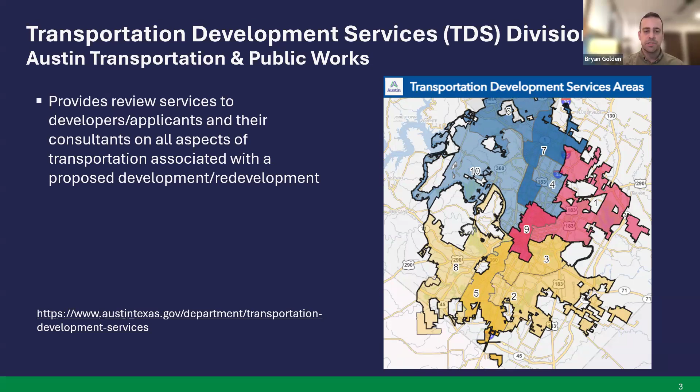Just to say, the TDS division is not within DSD. We're actually within the Transportation and Public Works Department, but we work in close coordination with DSD in the review of site plans, but also subdivisions and zoning cases and other permit reviews as well.

So I'll take the high level, 30,000 foot view here, and talk a little bit about how we guide growth in the city and the components that speak to that. The overarching planning document for the city is Imagine Austin, our city's comprehensive plan. It's a 30-year long range planning and goal oriented document that speaks to many different disciplines and priorities, some of which are transportation related.

We also have the Austin Strategic Mobility Plan, the ASMP, which you can think of as a transportation focused comprehensive plan. The ASMP stands with Imagine Austin as a separate document. It has been adopted by council, and similar to Imagine Austin, it's on a 20-year timeline, to be updated every 20 years, but still a long-range, forward-looking document.

The ASMP really speaks to all aspects of transportation within the city, so all different types of modes, meaning how you may get from one place to another - pedestrian, public transit, biking. We'll get into that more in a little bit. But the ASMP tells us what roads need to be built in the future, what bike facilities need to be built, in order to achieve the goals that Imagine Austin has laid out.

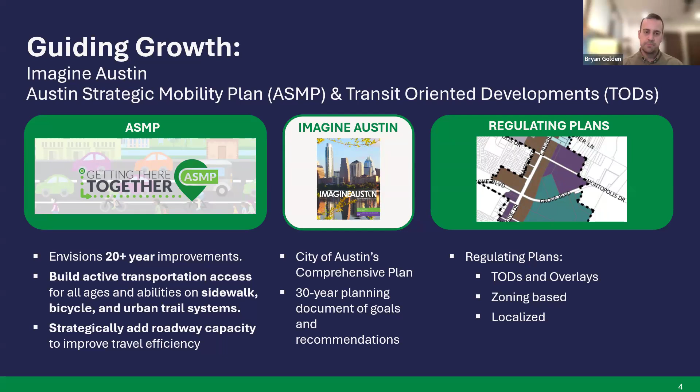Finally, the other little unusual piece of this is our regulating plans. You may be familiar with Chapter 25.2, the zoning ordinance, the zoning chapter of our land development code. The regulating plans are similar to 25.2, council adopted plans. The reason I bring them up is because they have their own specific set of transportation priorities and design criteria. We'll get into this more a little bit as well.

First, though, I want to dive into the ASMP just a little bit more. As I mentioned, it does speak to all the different modal aspects of transportation here in the city. So we have the public transit component, a bicycle system component, the urban trail system, pedestrian network, which would include all of the sidewalks, and then the roadway system, which is what most people think of when it comes to streets.

Drilling down a little bit more into the roadway system, we're going to focus on that a little bit here. We have the street network map, and what this map does is classify every street in the city with a level designation for every type of street, based on a level 1 through 5 classification. But we actually have a level 0, which would be alleys.

Most of the development that you may be familiar with will be occurring on a level 1 plus street. The way I like to think of these street level classifications is you could think of it as a river's tributary system. We have our level 1 streets, which are our local streets - that may be what single family homes are fronting, what you think of as your neighborhood street, your direct access. These are low capacity, low volume roads, and you can think of them as the tributaries of a creek.

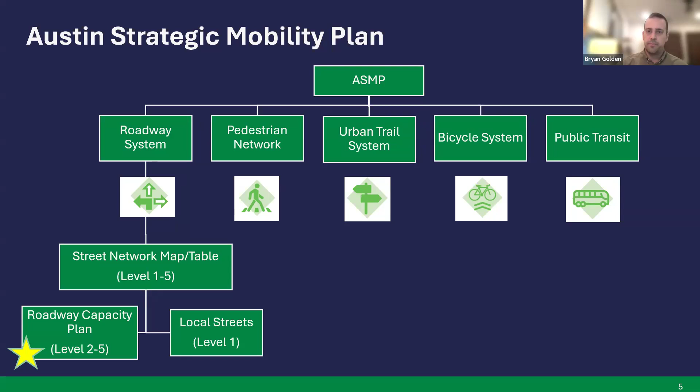The roadway capacity plan is literally a map of the projects that the city will implement in the future, either through capital improvement projects or through the development process. This roadway capacity plan identifies new streets that need to be built, or widening or upgrading substandard streets that may not have curb and gutter right now.

All in all, there's about 1,100 different projects included in the RCP, the Roadway Capacity Plan. These are divided up into 17 different service areas, and I'm not going to go into that, but that's referring to the street impact fee. There are different service areas associated with that.

But just to say that it is dispersed. These projects are dispersed all over the city, and they're based on prioritization models, which include development patterns, growth trends, and different community criteria.

So travel choice, how residents move along a corridor, how they need to get from point A to point B, commuter delay - that may be how long somebody has to wait at a signal - traffic safety aspects. So we look at crash data, and we look at our Vision Zero policy, as well as access and connectivity. So what new areas are built that need to be connected to existing areas, or existing areas that need additional connections.

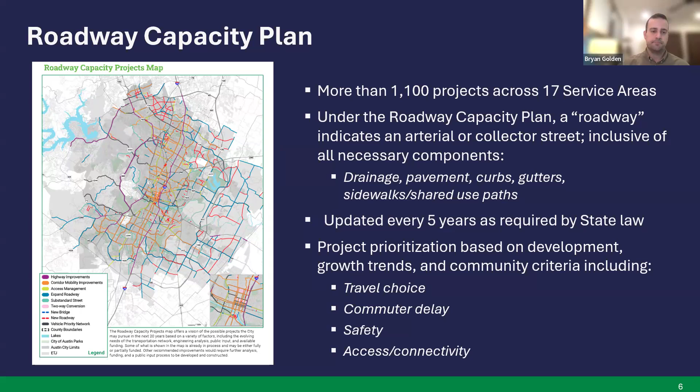So following up again with the regulating plans. As I mentioned, these are council adopted. They are regulatory plans, meaning that if you have a site, if you have a development that falls within the boundaries of a regulating plan, then your site is subject to those rules and regulations.

Right now we have 5 different regulating plans. You may also hear them referred to as transit-oriented developments, TODs. These plans were developed to guide additional growth and density into areas that are well served by transit, and to orient development to capitalize on those transit connections.

Briefly, I want to also mention - you may have also heard the term Great Streets for downtown and the University Neighborhood Overlay, the UNO district. These are not actually regulating plans. They're overlay districts, so they're really opt-in to a density bonus program.

So if your site falls within either the downtown density bonus area or UNO, which is primarily West Campus, you can opt in for your development to have increased density or height. Subject to that, you'll be required to adhere to certain streetscape requirements - lighting, enhanced materials, wider sidewalks - but it's not regulatory in the sense that these TOD plans are.

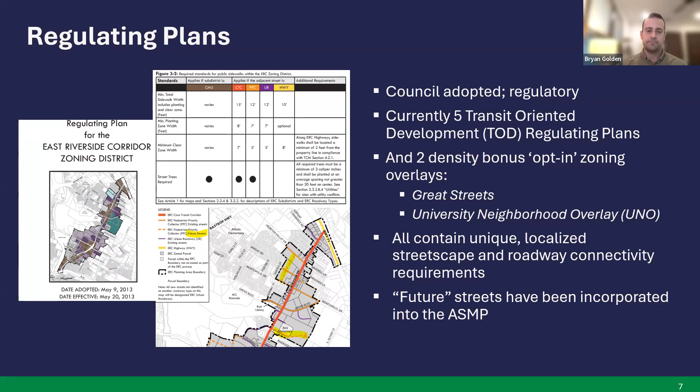All right, so now we've talked about the bigger background picture, what guides us in our growth, and now I want to talk about what that looks like at the more site level, and how we actually review and guide development themselves. So there are 2 primary components to this.

The city's regulatory authority to review sites and site plans for developments comes out of Title 25, which is the Land Development Code. Transportation specifically - most of our elements come out of 25.6, the transportation code.

And what you will find under 25.6 would be right-of-way dedication requirements. If you have a large site, you may be required to submit a traffic impact analysis or provide some off-site mitigation - that comes from 25.6.

Our former parking requirements and existing loading requirements also come out of this chapter, as well as the street impact fee, which is its own ordinance but is included in 25.6. So the Land Development Code tells us what needs to be built, essentially, what needs to happen.

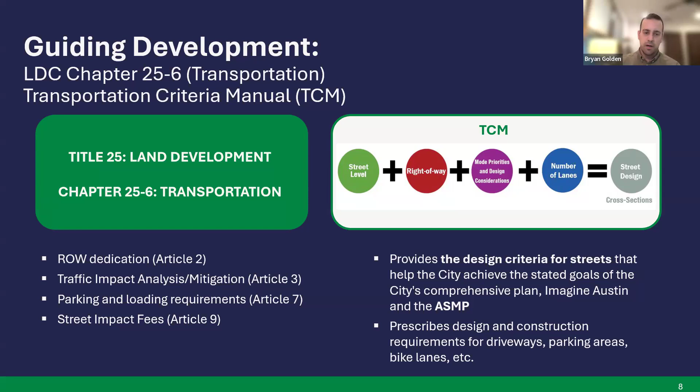But it also includes elements that are site specific. So the TCM tells us how wide a driveway should be, what a driveway needs to look like, what parking areas need to look like, and how wide a bike lane needs to be on the street. It's a very large, encompassing document, and we refer to it quite a bit in our review.

Mostly that's used for new street construction and more so in new subdivisions. If we are building new streets, or if a developer is building new streets, we will refer to this section, which tells us how wide those lanes need to be and what type of travel lanes those need to be.

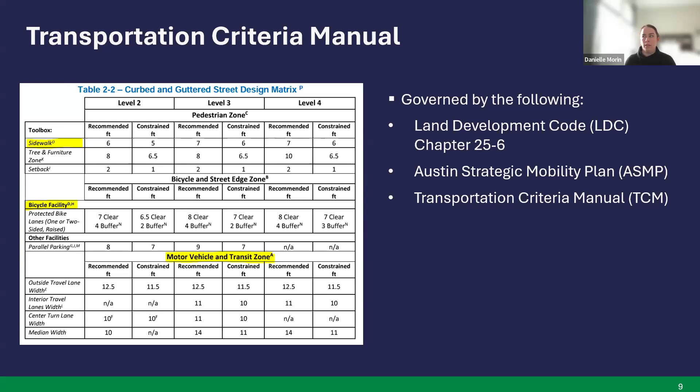So I'm going to hand it off here to Danielle, who's going to go into a little more detail about the site-specific design. Thanks, Brian. Yeah, if you can go to the next slide, that would be great.

Perfect. All right, so I'm going to talk more about what you can expect from us as transportation reviewers. I'm Danielle Morin. I manage the south area of that map, council districts 2, 3, 5, and 8. I don't know if Brian mentioned it, but he's the central, and then we have Renee in the north.

So our site plan review, we really get our authority from the Land Development Code. Chapter 25-6 is where we get that. Chapter 25-6 talks about our long-range transportation plan, which at the moment is the Austin Strategic Mobility Plan, or you'll probably hear me say ASMP pretty often. And then the design elements come from the TCM.

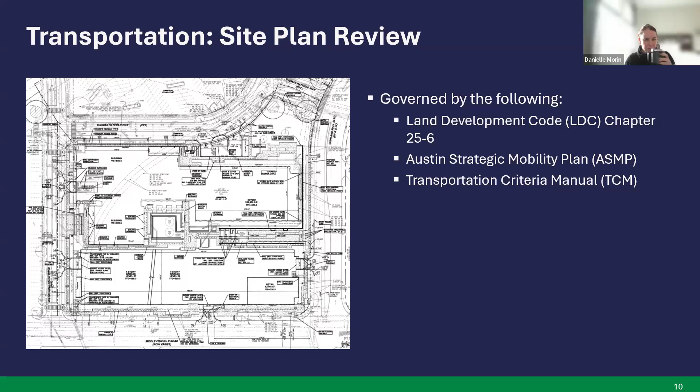So when you submit for a site plan, one of the first things you'll be asked to do is fill out a TIA determination worksheet. This worksheet is typically filled out by an engineer, and what it will ask is the land use that you are proposing on your site, and then the associated number of trips that site will generate.

This will tell us whether or not a specific analysis is required, and we have a couple different types. We have a neighborhood traffic analysis, for sites that generate 300 daily trips or more, with some caveats on the different types of zoning nearby. We also have a transportation demand management requirement, for sites that generate anywhere between 2,000 and 5,000 trips. And then we have a full transportation or traffic impact analysis for sites that generate 5,000 or more trips.

What these analyses give us is a glimpse of what the site will be generating. It allows us to impose restrictions if necessary—it could be access restrictions, where we say we really only want access on a certain roadway, or that we need you to reduce the number of driveways. It could be that we need additional pedestrian or bicycle connections in the area. These analyses let us study that, and then allow us to require that during our review.

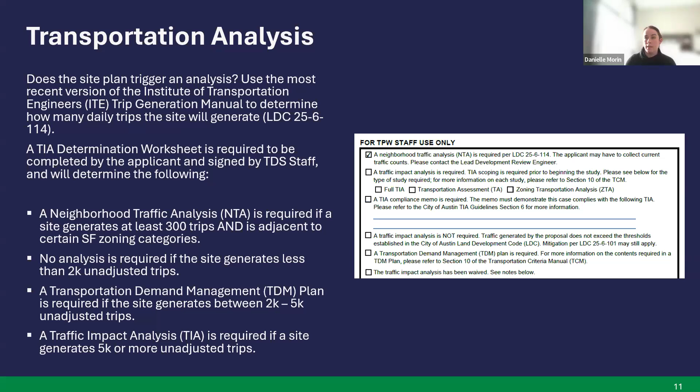Right-of-way dedication is really important. It's fairly often that we get site plans submitted where the site has been designed without considering the right-of-way that is required to be dedicated. This can cause significant delay and can require the site to be redesigned.

So one of your first steps, if you are submitting a site plan, is to look up the ASMP and look up the roadways adjacent to your site. You can pull this up - this one is Middle Fiskville Road. You can see the street level classification, the existing right-of-way, and what type of right-of-way will be required. That's typically measured from the existing center line of the roadway into your site.

So you can take that number - let's say 80 feet is required. You can look at the existing center line, measure 40 feet, and assume that's what will be required of your site to dedicate. That allows you to decide where your buildings will be placed, where you're going to put your sidewalks, where the curb will be located. It gives you a heads up on what you can expect from us as reviewers, and allows you to design your site so you don't have to redesign at U1 or U2.

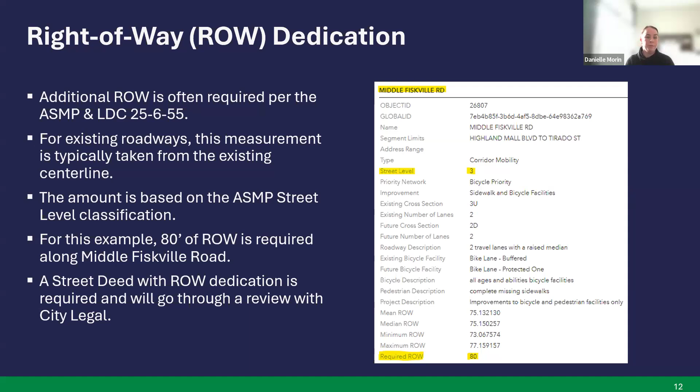So Brian mentioned that we no longer have on-site parking requirements. That allows each site to be pretty flexible and design parking based on their use and what they think their site will generate and what they will need. This can be helpful as a cost saving measure, especially for affordable housing units or smart housing.

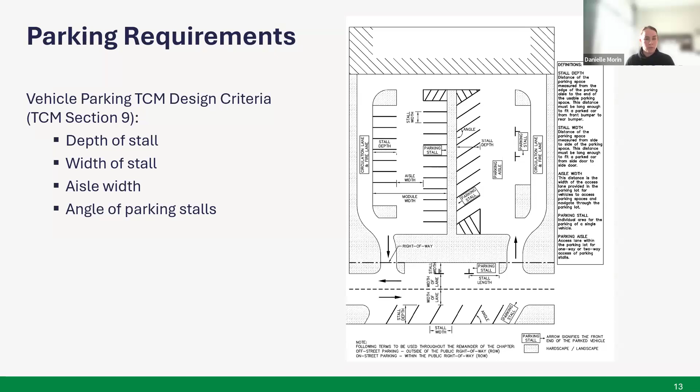But as reviewers, I think there's a misconception that we only review parking on the street - we actually do review on-site parking. So if you're submitting something with a parking lot or a parking garage, it is something we will review and you'll get comments from us on. Some of the things we look at are the depth of the stall, the width, the angles, things like that. You'll get comments from us, and we'll give a general look to make sure the site flows safely. Next slide, please.

Based on those parking requirements, we do require bike parking, which is divided into two different types: short-term bike parking and long-term bike parking. You can find those requirements on our website.

Short-term parking is convenient for somebody walking by a site, wanting to park and secure their bicycle, walk into a store, probably not leave it super long. Long-term bike parking you can think of more as maybe an employee that works at a store, or somebody visiting a friend in a multifamily complex.

For long-term bike parking, we look to make sure there is room for the bike parking, and that it's secure and covered. A lot of times multifamily or office buildings will have a secure bike storage room, which has become popular as of late. So those are things you can expect from us as reviewers.

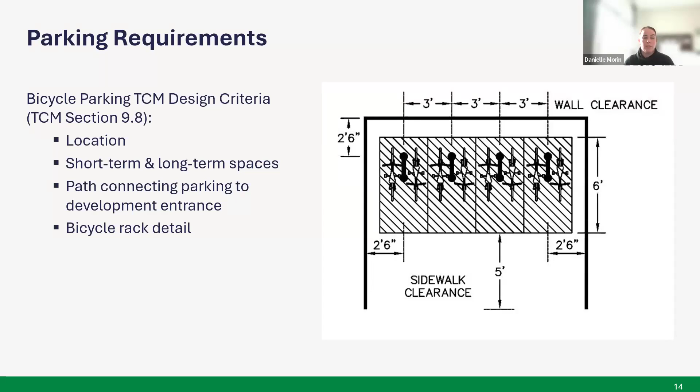Pedestrian parking paths are new to this iteration of the TCM, which has been out for a couple years now. This provides - if you think of going to a store and parking your car - a safe place to walk into the store instead of going behind your car and walking through the drive aisle. It gives you a place to push your cart, walk, maybe a baby stroller, but provides a safe pedestrian option to get into the store.

So that is required for 50% of parking spaces now. The materials we look at - if it's not required to be an ADA route, then you can get a little creative. A lot of times there are impervious cover restrictions we're working with, or aesthetic considerations we want to look at.

So it could be crushed granite, or a variety of materials - we've seen developers do a couple different iterations of that. But it is required, so just be aware of that when designing your parking layout. I think it's pretty common that we get parking lot designs submitted that don't take this into consideration. Planning for this before you submit could definitely save a lot of time. Next slide.

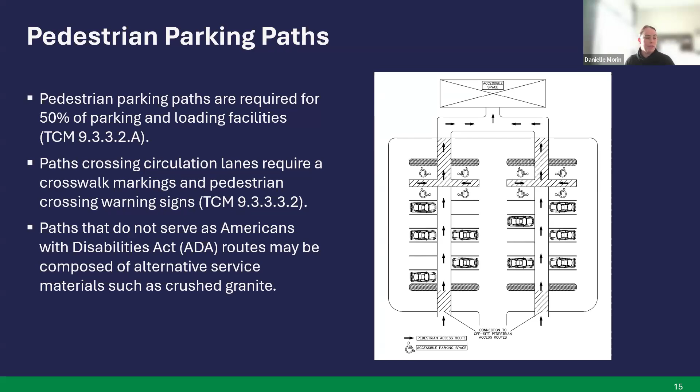I think a lot of times, especially now, loading spaces are used by Amazon delivery trucks or Uber Eats type deliveries. So they are important, and it's important that the user knows where they are. Proper signage is important, and just make sure that they work and flow with the site properly.

We do not allow loading or unloading in the public right of way, so make sure you've accommodated that on your site. That also goes for trash. Trash is something we as transportation reviewers also look at. We see a lot of smaller or infill sites that don't account for trash or how a trash truck will collect it. So think about how a trash truck would maneuver without conflicting with pedestrians or cars.

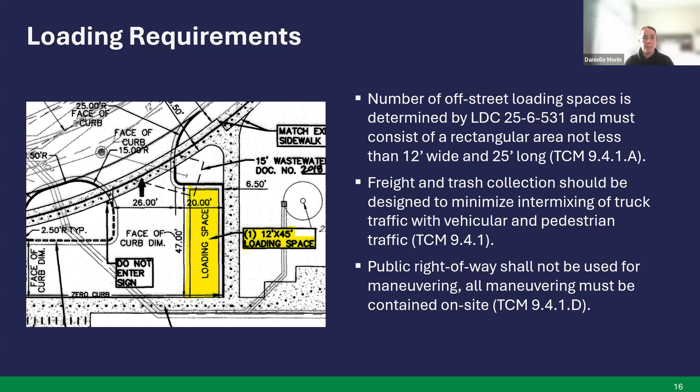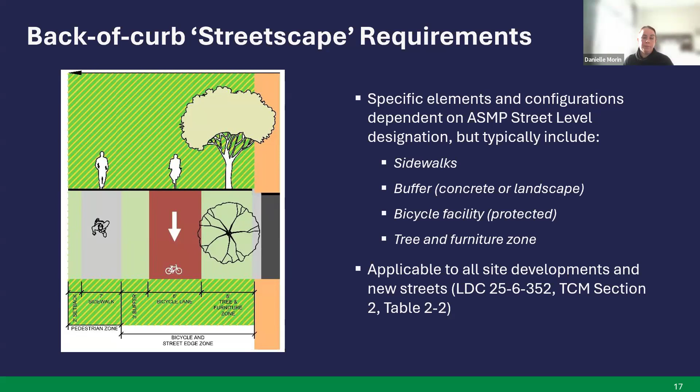One thing you may or may not notice is that the new TCM now shows bike lanes at the same elevation as sidewalks, raised from the roadway instead of just being painted in the roadway. That's something to consider when designing where your curb is on your site. This applies to all new developments, so this is something you'll definitely get a comment on from us, and make sure you account for it in your design.

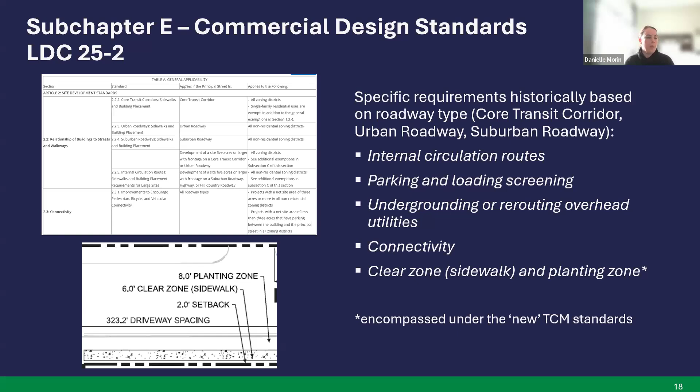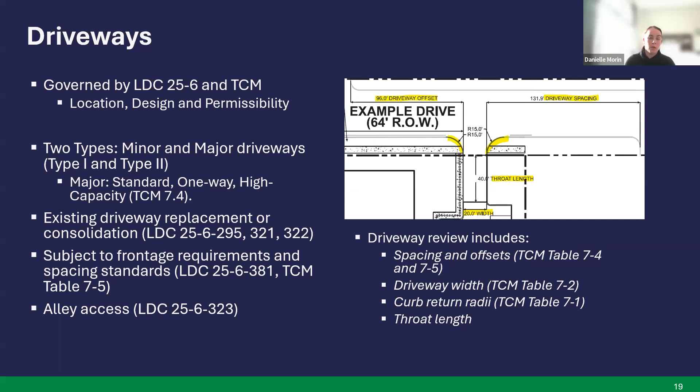And then lastly, we do look at alley access. So if you have a driveway proposing to take access from an alley, you can expect some comments from us on that. Next slide, please.

And that's pretty much all we've got. Happy to answer questions from people online and or at a later date.